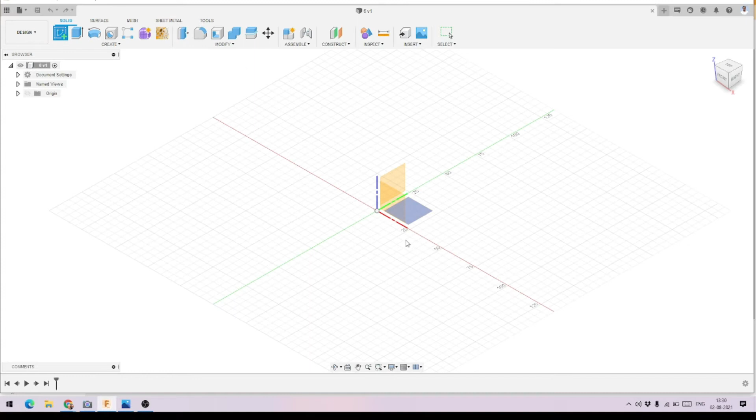We'll start with a sketch here. We'll click on create a sketch and select the plane to create a sketch. Here you can see I had selected the plane and my sketch tools are active now. So I am going to use the center rectangle tool. I will go to the create option, then rectangle, and find my center rectangle tool from here. I will create a center rectangle like this.

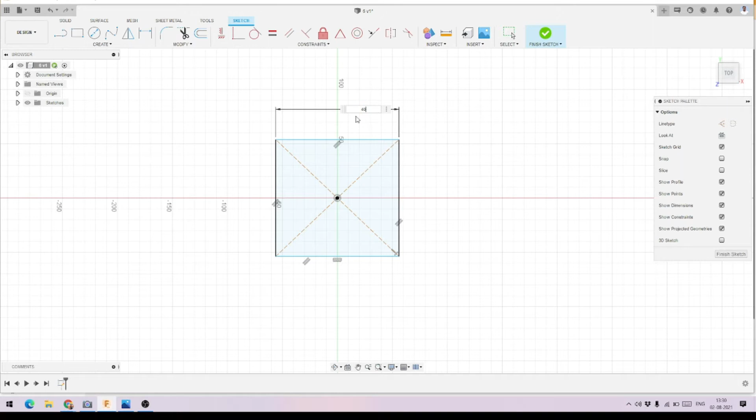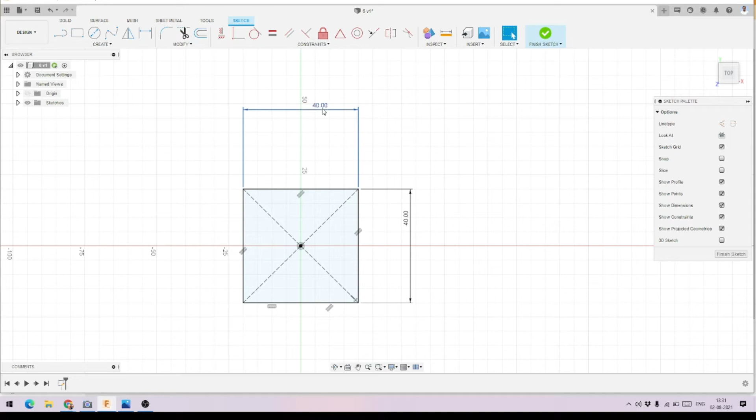I will keep it at any random dimension since I am going to redimension it to make everything correct. So I will dimension it as 40, and this side I will write as 50. Let me cross check with the dimensions: the vertical is 40 and the horizontal is 50. So I will change it here: vertical as 40 and horizontal as 50. And I will click on finish sketch from here.

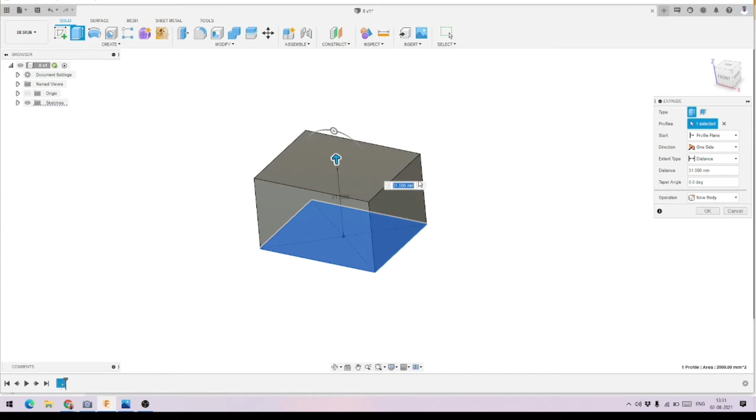Here you can see I had created my rectangle over here. I rotated it a little bit to give it a 3D view using my orbit tool. Now I'm going to give it a 3D height using this extrude tool. I will activate this tool, select the profile, and drag it upward. This dimension is 40 millimeters, so I will write 40 and press OK. Here you can see I had created a cube of 40 by 40 by 50, as per our dimensions and measurements.

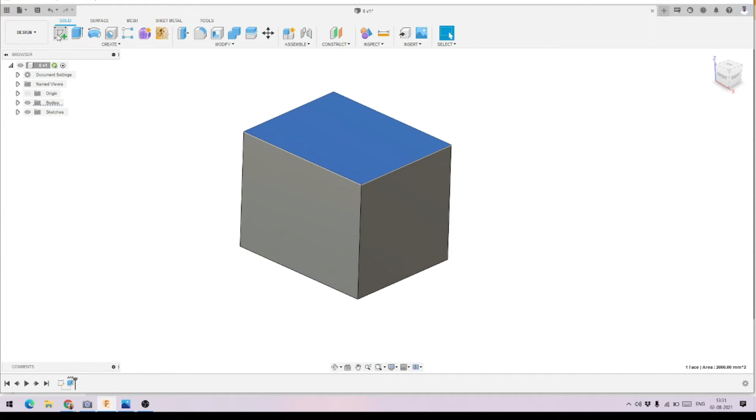Here you can see we got one line connected from this point to this point, and we got 3 more lines and a center line like this. We'll create lines randomly first, then we'll dimension the things. I will connect it like this, then create a few more lines like this, and from this corner to this corner like this. So this is almost all the sketches.

Still we have to figure out some few more measurements. So I think we did something wrong here. One line is here and then other is crossing this line. So we'll change that. So we did something wrong. I had deleted one line from the center of this sketch, and the next thing is we have to correct that, right? So we have to extend this line.

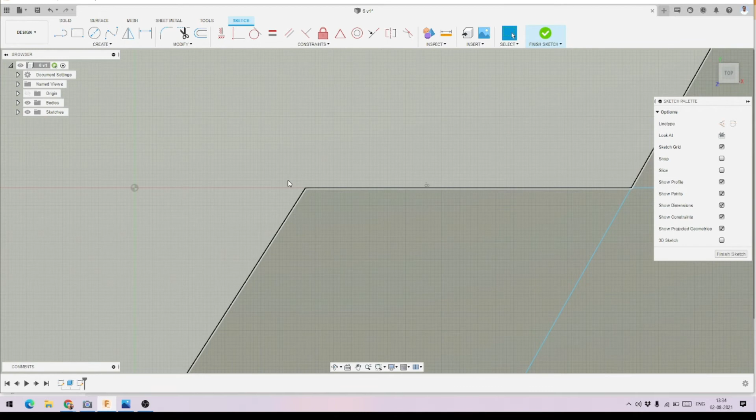So we had trimmed down the extra line, and the next thing is we had this measurement of 10 millimeters. So I will dimension this as 10. This line here is completely free to move, so we'll apply the constraint here to make it horizontal. We'll select the line, apply this horizontal vertical constraint, and it is horizontal now.

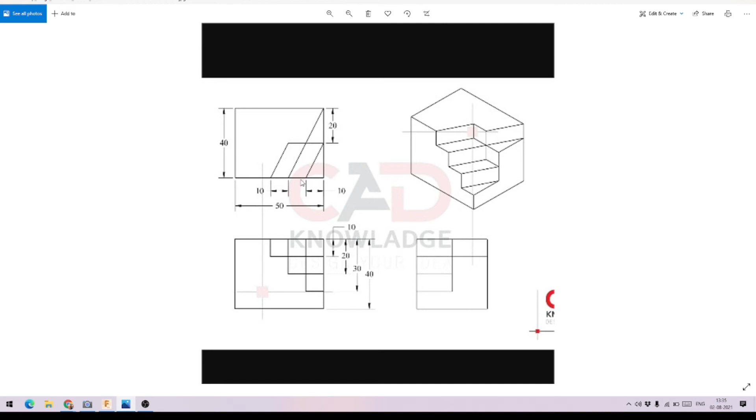We are still able to move this line, because we also have to provide these measurements here. From the sketch itself we don't have that measurement, but we can still give it a 10 millimeter dimension here, approximating by the views. So we'll come over to our sketch and write 10 millimeter here also, from this point to this point like this.

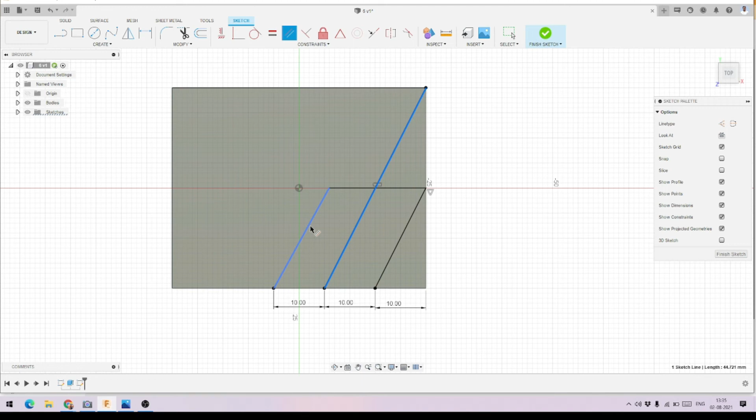We need this line and this line parallel, so I will apply the parallel constraint. I'll activate my parallel constraint and select both lines, and they will become parallel. So we are now finished with the sketch here.

Now we can click on finish sketch, and we'll orbit it a little bit using the orbit tool to see a 3D view, so we'll be able to figure out what we have to do next.

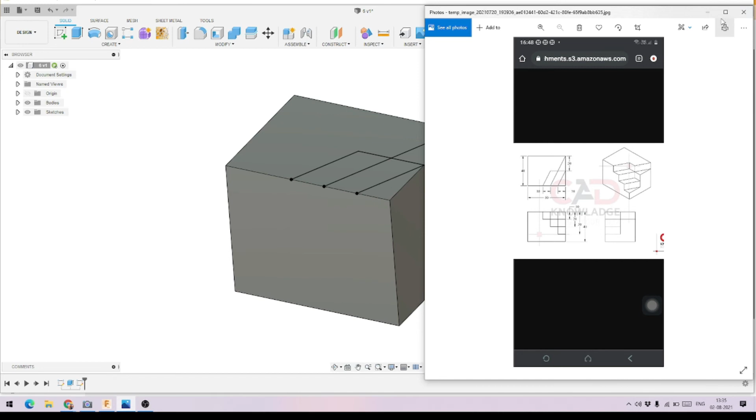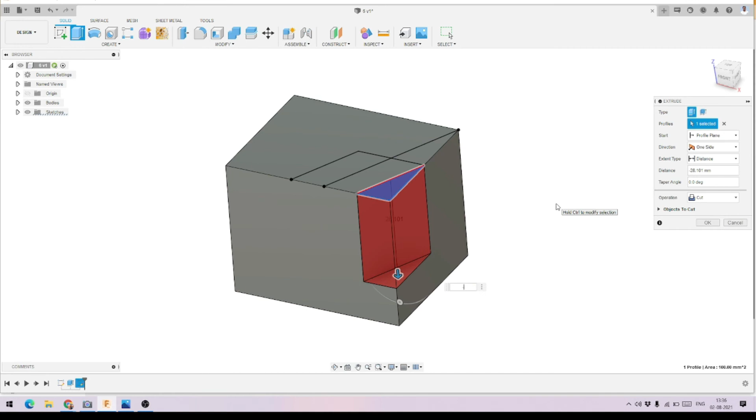The next thing is we have to start extruding with extrude cuts from this cube. If I zoom in on the image, the first depth cut we need from the top is 30, then 20, then 10, like this. So for the first step, cut by 30 millimeters. We'll activate our extrude tool, select that profile, and drag it down by 30 millimeters. So we'll write -30, and here we are done.

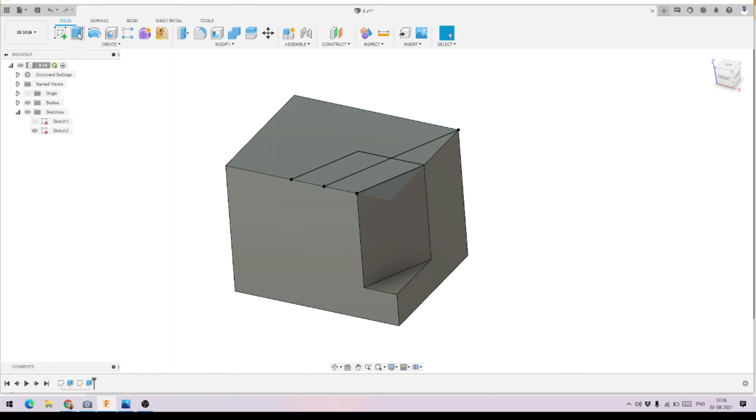Since we are done with the sketches, we have to turn on the sketches again to see the profiles. The next thing is we have to make a cut of 20 millimeters, 20 millimeter down from the top. We'll activate the extrude tool again, select the profile, and go down by 20 millimeters, writing -20 like this.

The next step is we have to make another cut, this profile and this profile, by 10 millimeters. We'll come over here, select the profile, activate the extrude tool, select both profiles and write -10 like this. Here you can see, and here it is.

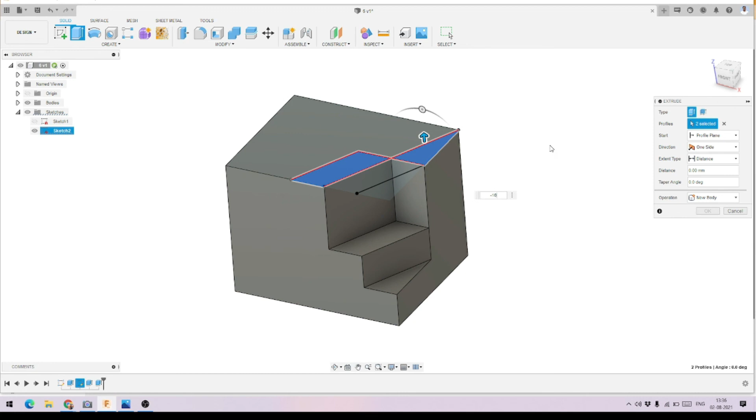Once we turn off the sketch, this is our 3D model that we had created following that sketch. I think we are done, we had completed the model.

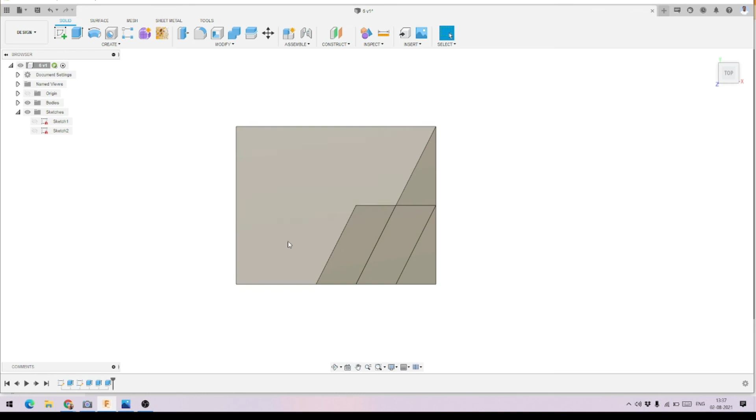So it will look something like this. If I see it from the top, it must look like the top view of our sketch. I will rotate it like this and try to see if it matches. Here you can see this is our top, and this is the thing. So we are correct now.

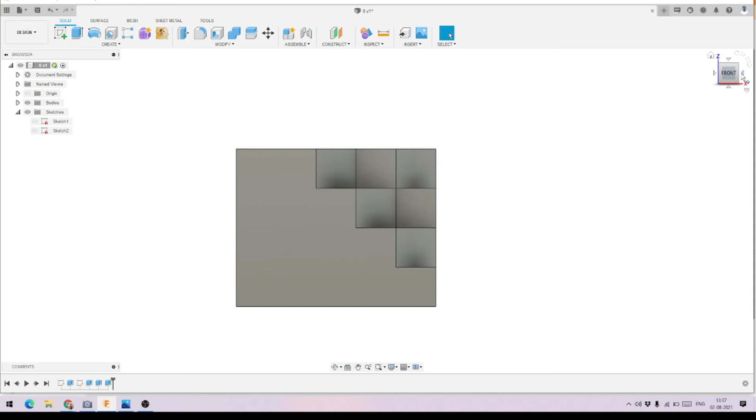If we see it from the front view, let's see how it looks. We'll rotate it a little bit, so it will look like this, matching this view. And if we see it from the right side view, it must look like this. Here you can see it is looking like this. So I think we are done with the 3D model.

This is how you can also create and practice this 3D model. It is very simple. And if you are not following my other videos, go and watch, because they are very simple. I always try to make very simple models and teach you in a normal manner, so you get the process of how we are doing this 3D model. So go and follow that video.